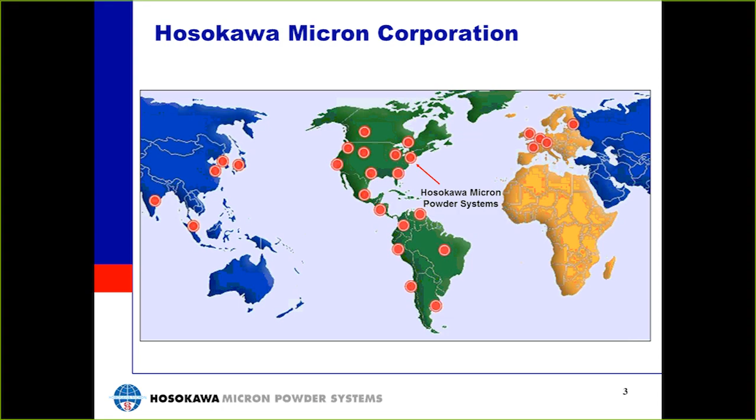Hosokawa Micron Powder Systems was founded in 1923 under the name Pulverizing Machinery. We design, manufacture, and assemble equipment for size reduction, classification, mixing, compaction, and laboratory analysis in the North and South American markets. Our equipment is designed for chemicals, food, pharmaceuticals, minerals, cosmetics, and plastic industries. We have a research and test facility complete with analytical laboratory in our Summit, New Jersey office, where we encourage our customers to join us for trials and system evaluations.

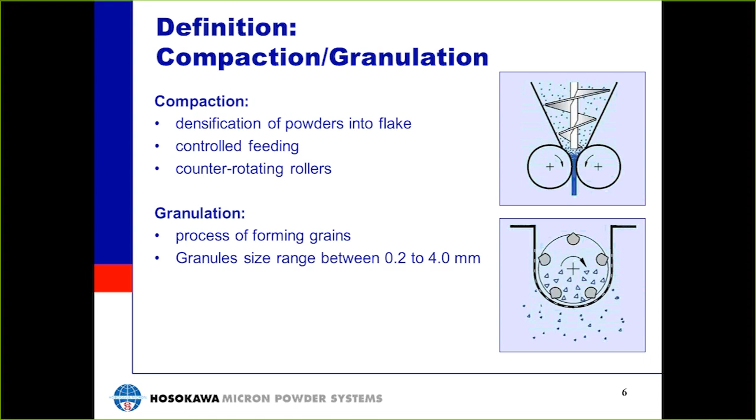For granulation, I found something in Wikipedia. Granulation is the act or process of forming or crystallizing into grains. Granules typically have a size range between 0.2 and 4 mm, depending on their subsequent use. Transferred into our process, we use the term granulation for crushing the flakes into granule size.

Talking about briquetting - the word itself sounds a little bit like brick, which is a single, solid, and hard piece. Briquetting is the densification of dry powders into a single, solid briquette. The briquetting process can take place with or without binder. The binder can be liquid or powder. For briquetting in a roller compactor, we can add that densification process is achieved by controlled feeding of powder through a set of directly opposed counter-rotating rollers.

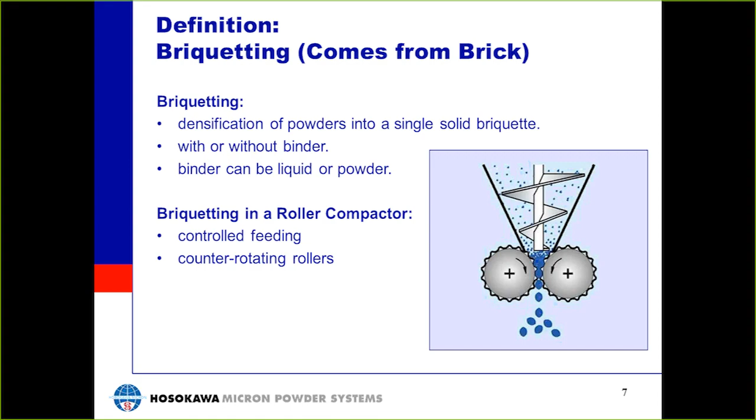In case we do not change the material nor the tools during a run, the functions are much simpler and can be seen as the volume fed into the roller gap, which is a function of the process. The volume which gets out of the roller gap can be seen as a function of the process too.

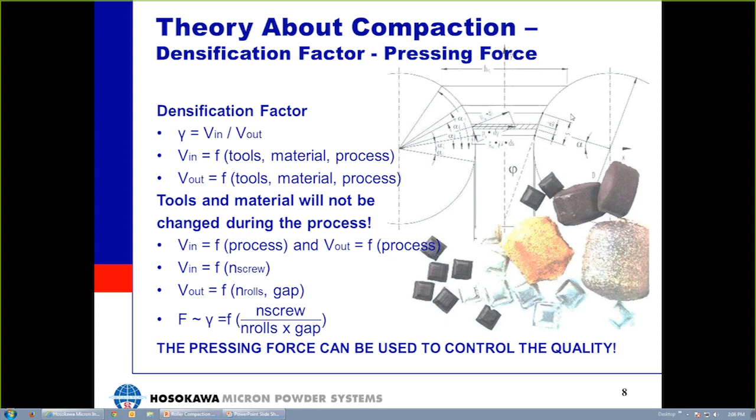The densification factor describes the ratio between the volume of the material before and after compaction. A hydraulic system always creates an external force to keep the rolls together. The compaction force is always created by the material. In larger roller compactors, one roll is designed fixed and the other one is equipped with a hydraulic device.

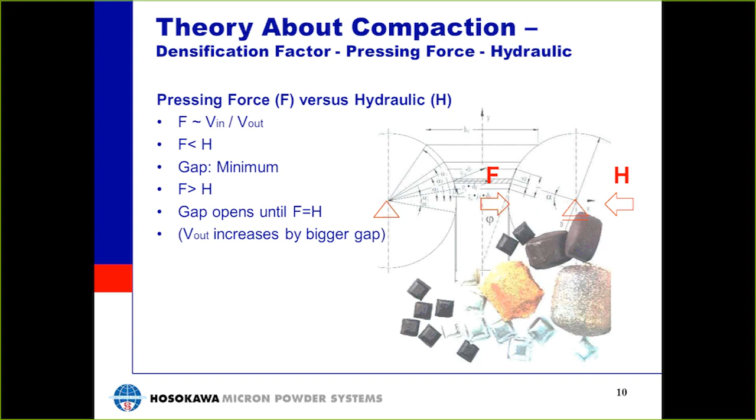In case the compaction force is smaller than the hydraulic force, H, the gap will be at the minimum. In case the compaction force F is bigger than the hydraulic force, the gap will increase until the compaction force F is equal to the hydraulic force. The system acts like a self-control. The hydraulic never creates a pressing force - it only limits it.

The compaction process can be divided into 3 zones. In the first zone, the material slips still a little bit on the roll surface, and only small stresses are acting on the material. The product starts to densify. The pressing force in this zone is 0.

In the second zone, the material doesn't slip anymore. The material deforms plastically under heavy stress performed by the rolls. The so-called nip angle is defined at the point where the material starts to move into the nip. Compaction takes place in this zone until the neutral angle is reached. The pressing force increases from 0 to the maximum value.

In the third zone, the material expands because the pressing force is reduced to 0. Due to this effect, the material speed is faster than the roll speed. The pressing force is reduced from the maximum value to 0.

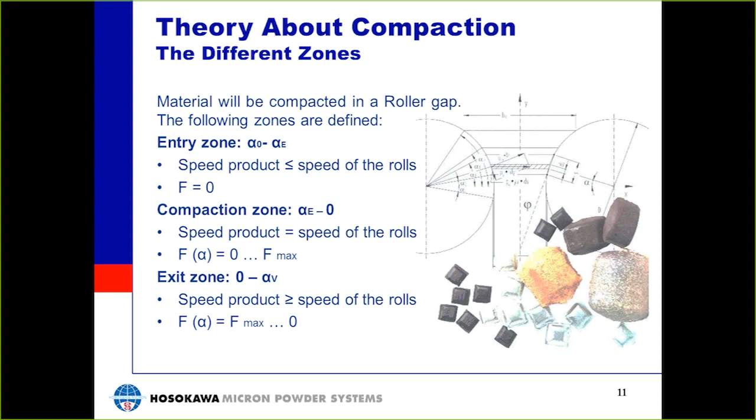Inside the different zones, the following happens. In the entering zone, the material starts to densify. The small particles start to move into gaps between bigger particles. Inside the compaction zone, the material moving process goes on. In case the feed material contains not enough fines, it will be created by pressure and friction.

The pressure inside the flake reaches the maximum value and the maximum density. The bonds are created. In the exit zone, the material releases the roller gap. The pressing force is reduced to 0, and the flake expands again.

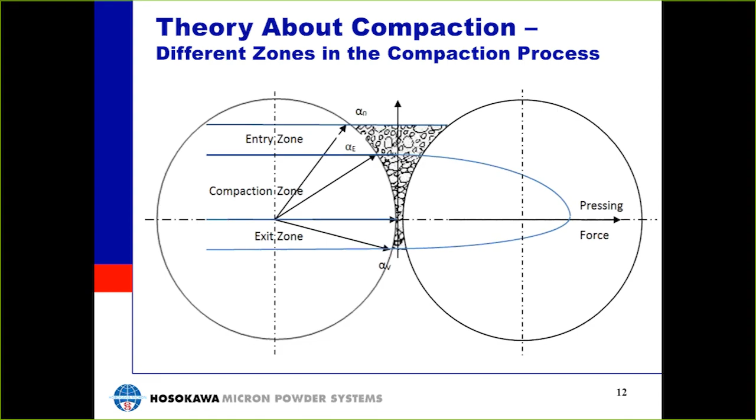In the exit zone, the flakes and briquettes are released from the roll. After taking the pressing force from the material, it will expand like I told you before, and this effect is related to the Young modulus of the material. The Young modulus is the tension divided by the strain.

But it's also something that too high forces will destroy already activated bonds. We call this effect the overpressing effect.

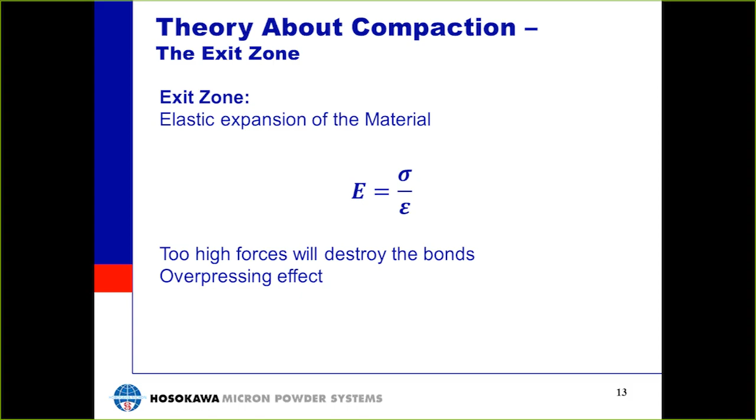When you don't want to have this effect inside, you have to reduce the pressing forces.

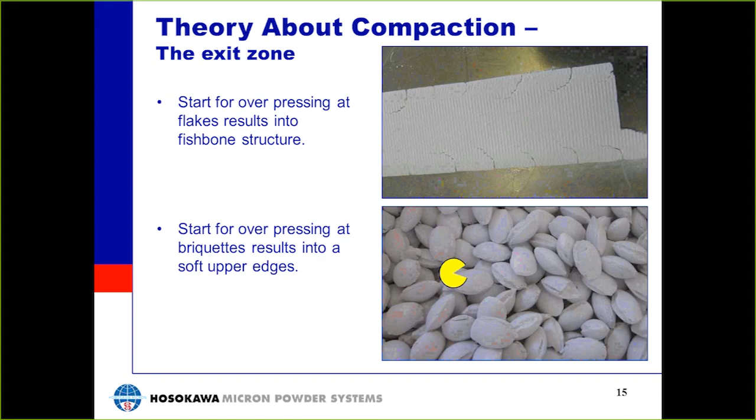All pressing forces will apply to the material via friction. In the easiest compactor, which has only gravity feeding, the part of the gravity force which acts rectangular on the surface of the roll works as a normal force. The friction force is equal to the product of the friction coefficient and the normal force.

You can see this here. At the same time, the already densified material will expand. So, to achieve high throughput, the compaction zone shall be as large as possible, which means you cannot increase the speed of the rolls as high as you want.

There are some machine parameters which help you to increase the nip angle. One is a rough roll surface or forced feeding. Most modern compaction machines do have a forced feeding system, mostly with a screw feeder. Also a low roll speed increases the nip angle, a small gap, and also a low pressing force.

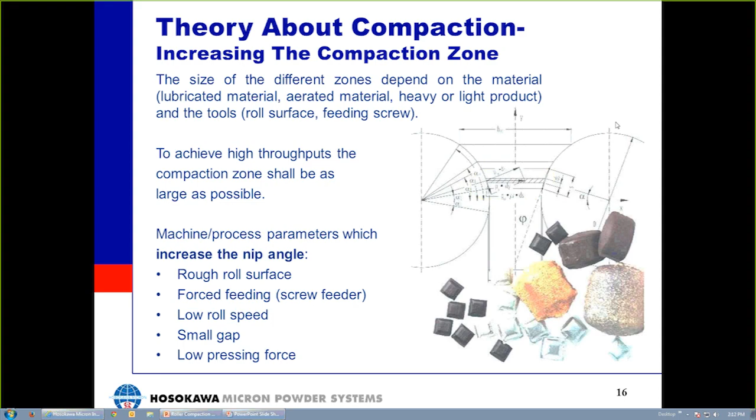In the exit zone, the material expands. There will be a relative movement between the flake and the roll. This is not critical for normal products, but in case of abrasive material, high wear occurs.

The roller gap influences the throughput. Due to the elastic expansion, a larger gap also increases the time for the material in contact with the rolls. In case of too large gaps, the flake or briquette can stay in the pocket of the roll.

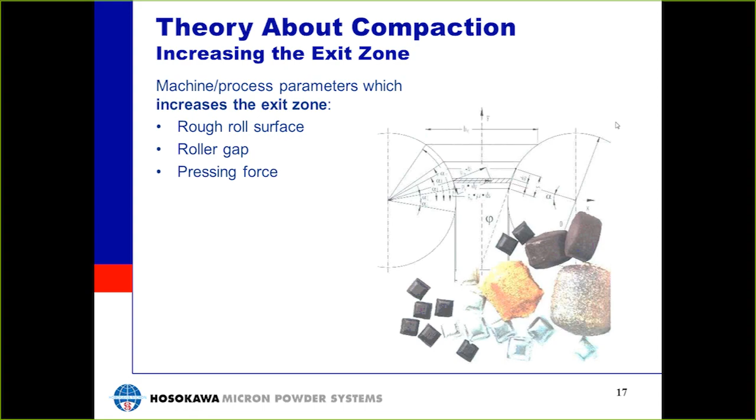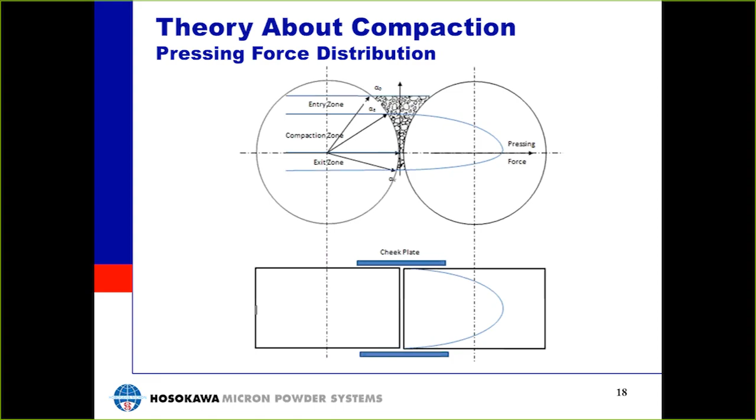The upper part of the picture shows the distribution of the pressing force in case of gravity feeding and flat roller surface. This is also known as the pressing force distribution according to Johanson. In the lower part, the pressing force is shown as a function of the width of the rolls. At the edges, it is zero. In practice, we work with a feeding auger to increase the compaction zone.

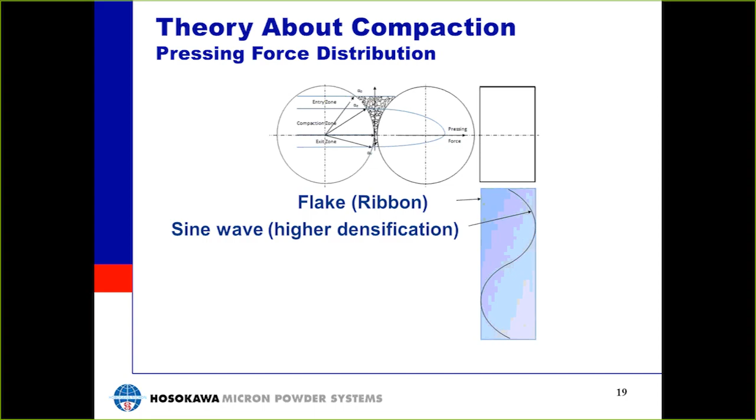So this is what you can see here. By using a feeding auger, a sine wave will be applied on the roll, which is caused by the last blade of the feeding auger. For better understanding, it can be explained that the powder material is more elastic than the last blade of the feeding auger. The real pressing force can be seen as a superposition of all three effects.

Powders with fine particles contain a lot of air. This air has to be removed during compaction. Removing of air always works by moving of particles. Therefore, a force has to be transferred to the particles, which is responsible for the movement.

The picture shows a model of how a force is transferred to the particles. An initial force F works on a particle which lays on three other particles. For every particle, the balance of forces is zero in x, y, and z direction.

The picture shows that due to this effect, the forces will be reduced on the right side by every contact they have. The second effect is in removing of all air with these particles which are acting like a filter.

The removal of air through a very fine filter is harder than a coarse filter.

In case of recycling of fines, for tabletting, the material which is less than 200 micron will be recycled and fed back to the compactor with the virgin powder. In most cases, the virgin powder has a D50 of 10 to 50 micron.

In case the number of particle-particle contacts are reduced by using recycled material. This effect is also often used in pre-granulation before tabletting in the pharmaceutical industry or in any other tabletting machine. As an example, pressing of hard metal plates for drilling equipment, pressing of special ceramics.

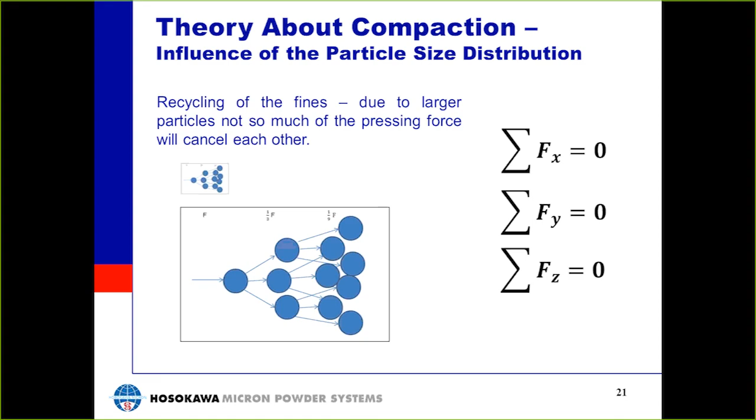In most applications, a certain amount of fines is required to fill the gaps between larger particles. In case this fines is not part of the feed material, it has to be created by friction and compression. The compression and friction require a part of the energy, which is the total pressing force.

To use more of the total pressing force, a wide particle size distribution, lubrication of the feed, and recycling of the fines are proper methods.

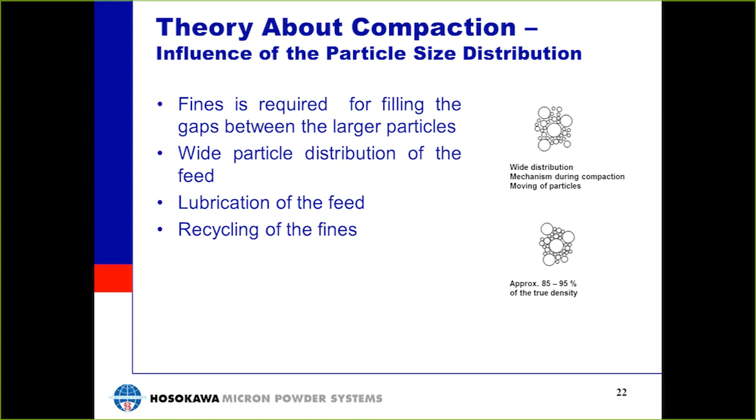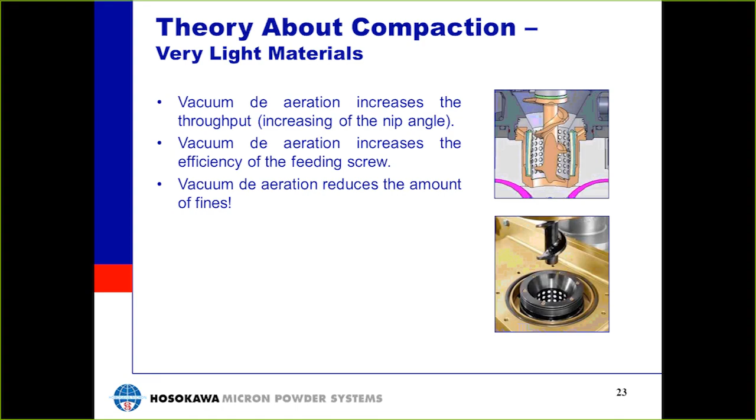A second effect of the vacuum deaeration is the reduced amount of air inside the product. The air of the feed material is released through the gaps between the roll and cheek plates. Due to the high speed of air, a certain amount of fine material will be taken with the air and leave the rolls without being compacted.

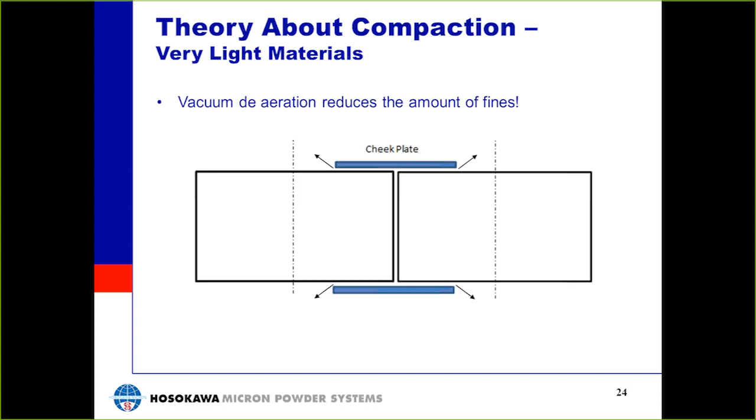In case of vacuum deaeration, the speed of the air in the gap between the rolls and cheek plates is reduced, and the amount of fines is reduced as well. On the other hand, the roll speed can be increased.

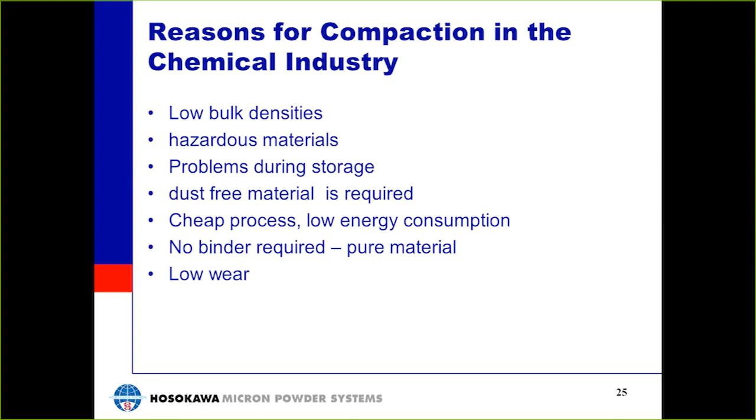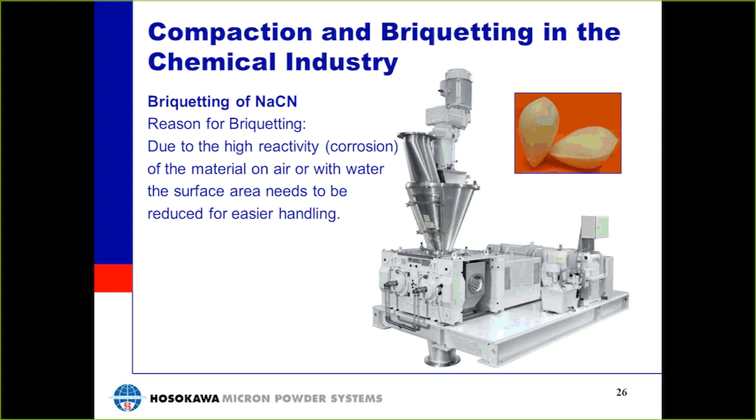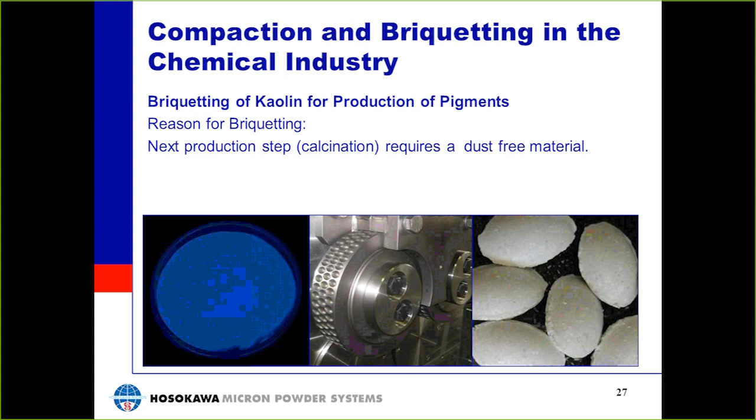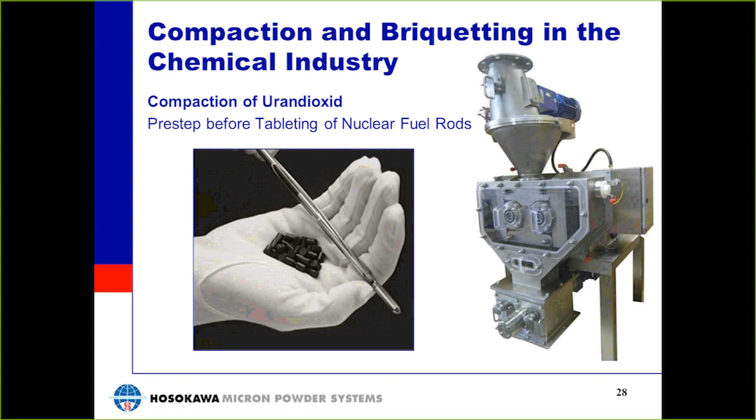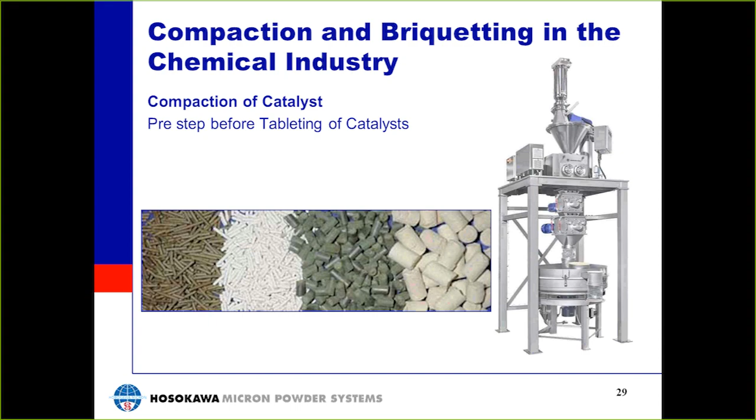The brake pad mixture is very abrasive. Because of compaction, pressing force in the tabletting machine can be reduced. This reduces the abrasion in the tabletting press because the pressing force in the tablet press can be reduced to achieve the same density.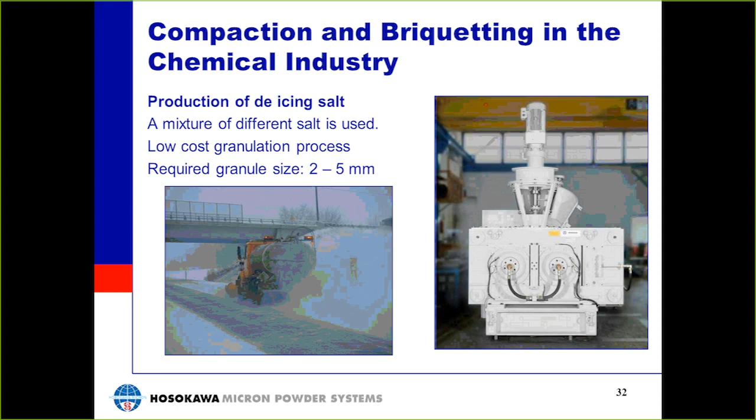There are different tests we can make on the material before and during a lab test on compaction or briquetting. The most important one is the Piston Press test. It is an initial test, used for testing the compaction behavior of a material. With a very small amount of the material, the compaction behavior can be tested. After that, the density of the tablet can be measured and also the strength.

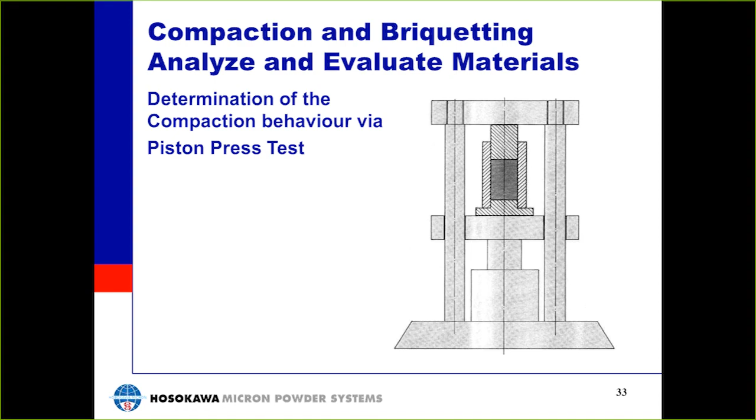During lab tests, the particle size distribution of the feed material and the granules can be measured. Therefore, an air jet screen will be used.

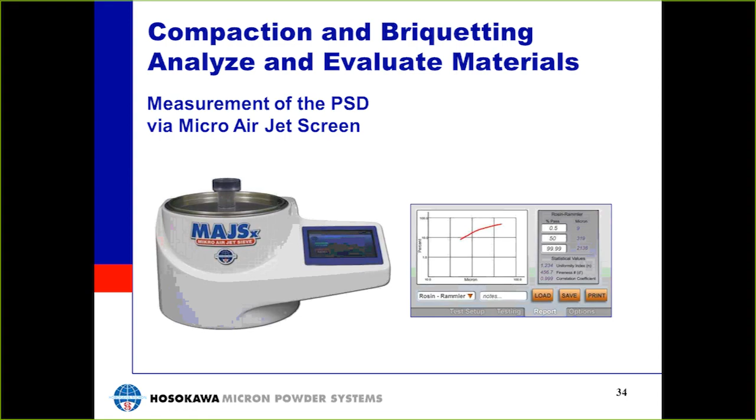The density of the flake or briquette is important for the quality. It influences throughput and also the hardness. The bulk density depends also on the density of the flake. For measuring the density, we follow the Archimedes principle. This is a simple method which can be carried out in a few minutes.

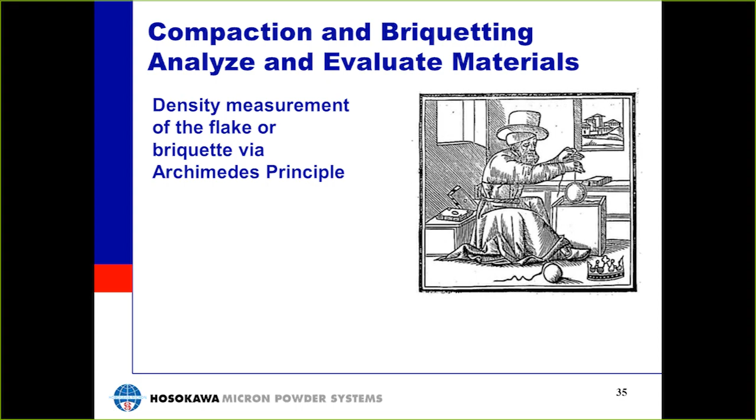The bulk density is important when the material needs to be packed in bags or to reduce the transport cost. In our lab, we can measure the packed and loose bulk density in the Hosokawa Micron powder tester.

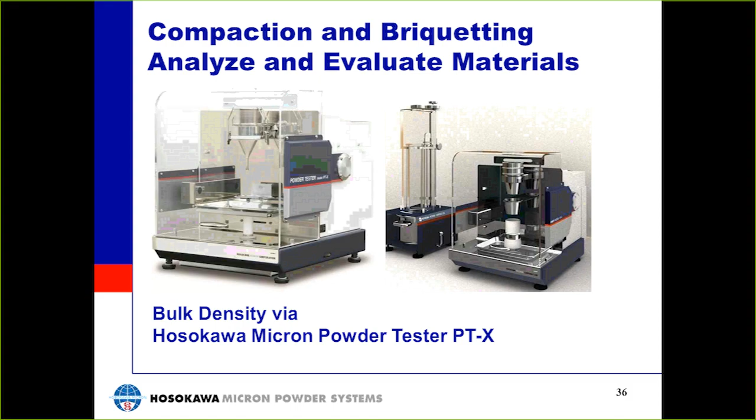The strength of briquette is important for the handling because it should be resistant during the transport to the place where it is required. For the shatter test, a sample of the briquettes will be de-dusted by screening. After that, it will be thrown from a height of 2.5 meters several times on a steel plate. These results can be given like: first fall from 2.5 meters, 95% bigger than 10 millimeter; and second fall from 2.5 meters, 90% still bigger than 10 millimeter.

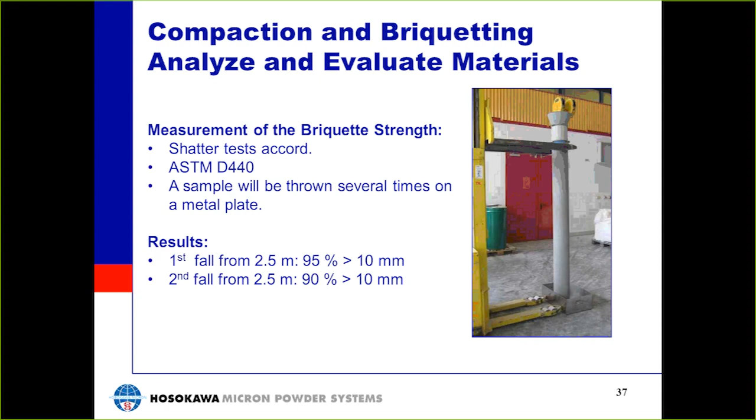The strength of briquettes can be measured also with a hydraulic press. Therefore, the pressure on the briquettes will be increased until it breaks. Two different modes can be used for measuring pressure and break resistance.

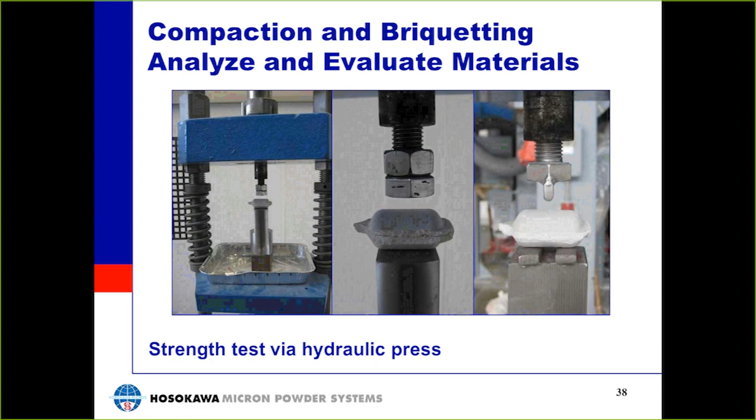Cleaning is done in a separate cleaning area. Typical for this system are a low-medium throughput capacity, variable batch sizes, multiple products, cleaning, and high quality of compaction are the most important issues.

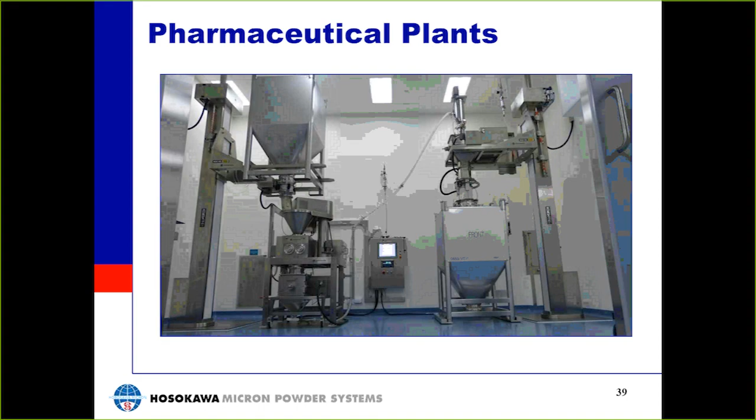For good and easy cleaning, these systems are mobile. All the cables can be disconnected easily. The heavy parts will be taken by a forklift. So you can see that, for example, here. And here you can also see that everything is splittable.

These installations are one-floor installations.

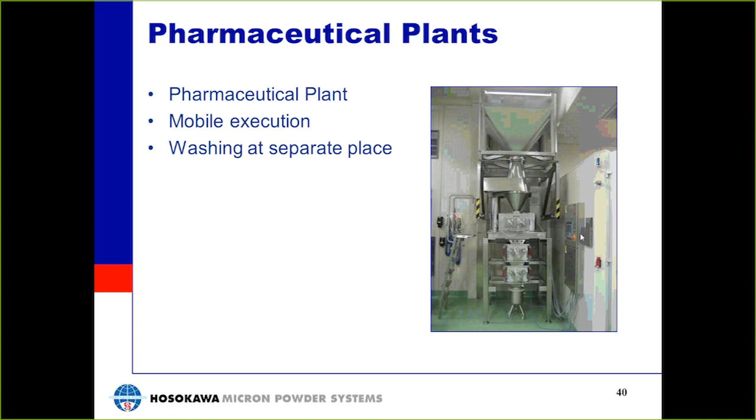For pharmaceuticals with a low amount of API, such as pharmaceuticals which contain very hazardous or multi-component API, compactors with a low throughput capacity between 50 and 120 kg per hour are often used. Systems for not-so-hazardous APIs are very similar to the small throughput systems for high APIs. They are characterized by low throughput capacities, small batch sizes, multiple products, and cleaning and high quality of compaction—contamination as low as possible is the most important issue.

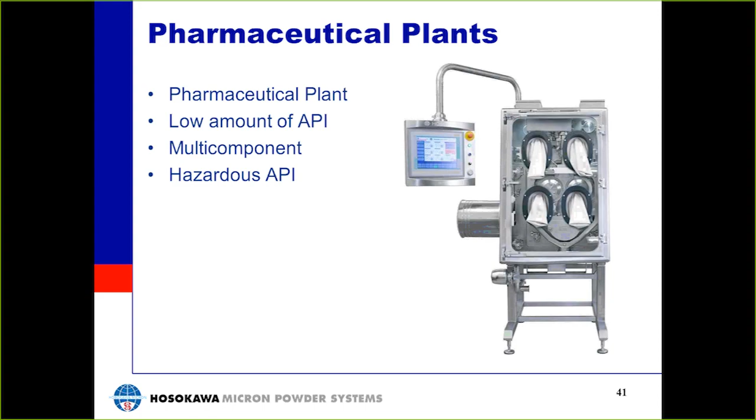For very hazardous API, machines inside a containment are used. Like shown here in the picture, protection of the operator has the highest priority. Cleaning and avoiding cross-contamination are also very important. Cleaning will be done inside the closed containment.

This picture is a good example of what we can offer our customer in case the standard design cannot meet their requirements: special materials and special coatings on the machine, based on our standard.

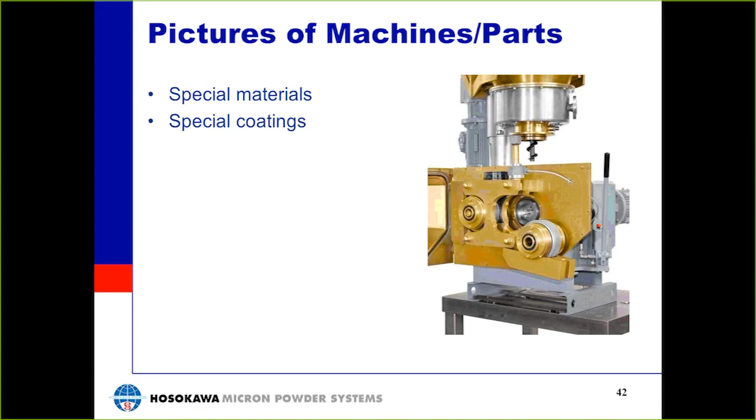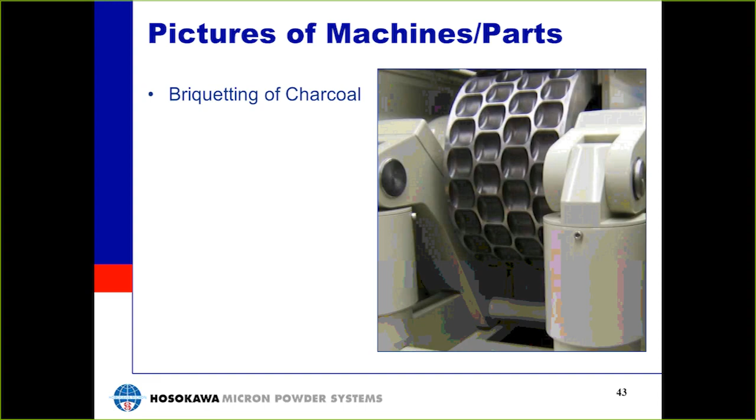For briquetting of charcoal, we have a low pressure version because briquetting of charcoal does not require so much pressing force. Here you can see a roll tire of a briquetting machine with almond shape. The throughput of this machine is about 10 tons an hour.

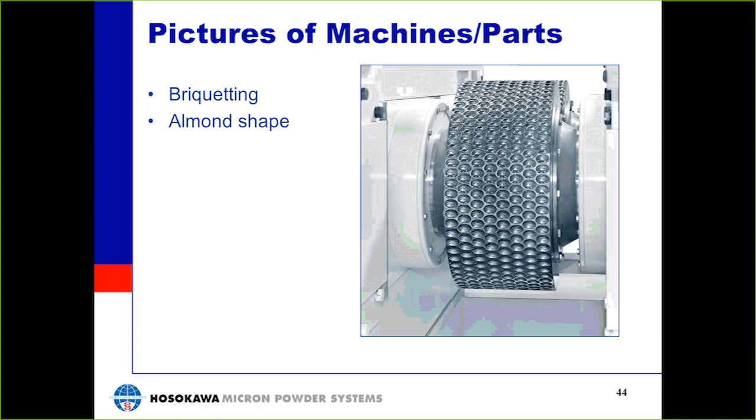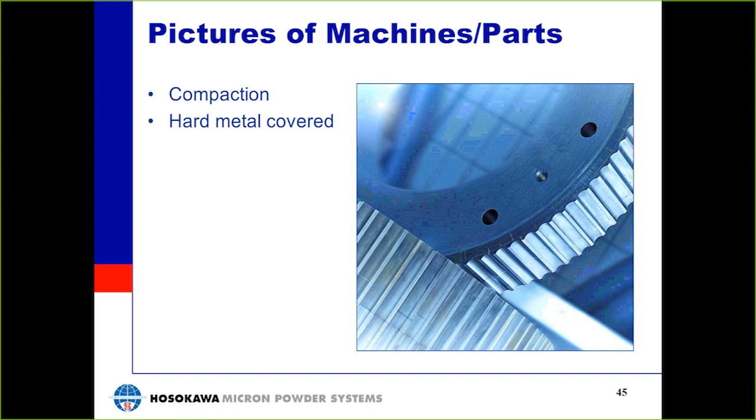These rolls are designed for very abrasive materials. They are hard-faced with hard metal. Here you can see a standard roll tire used for compaction, and a smooth roll tire used for high-pressure roller grinding.

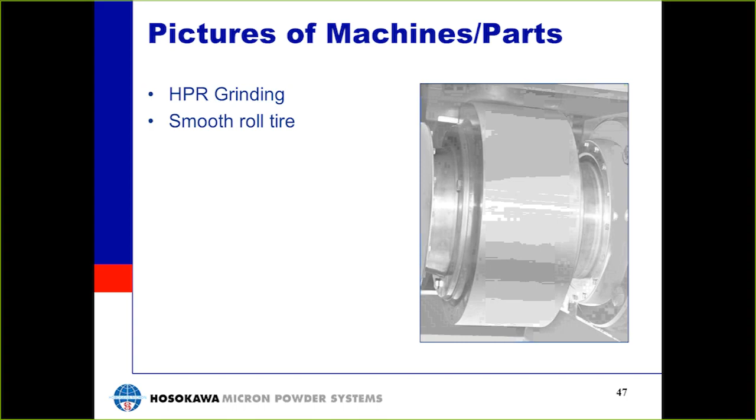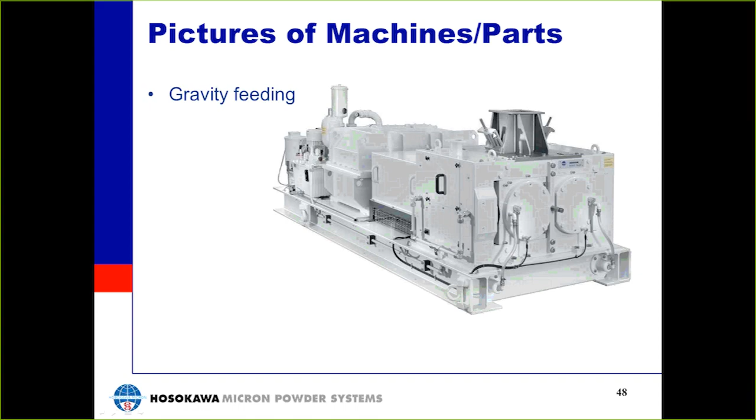A roller compactor with gravity feeding. The sliding gates here at the side are for adjustment of the flow.

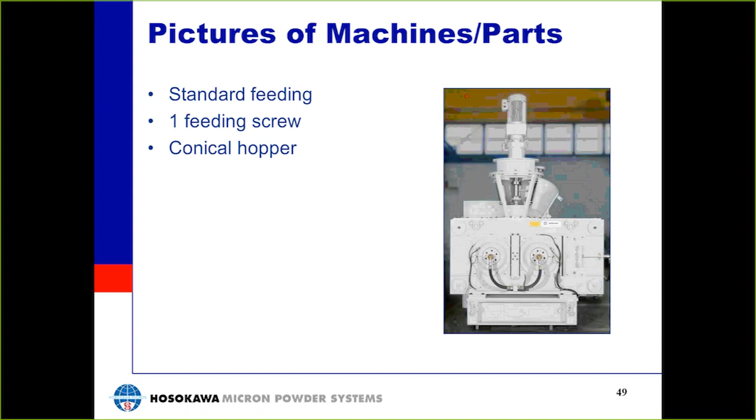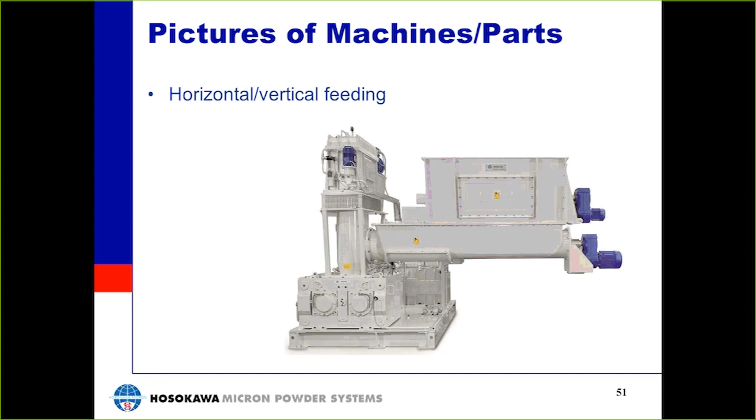So during the last minutes we talked about the theory of compaction, the different forces which act on the particles to perform the bonds. The stages of compaction in a roller compactor were described. Special solutions like vacuum de-aeration were explained. Examples for compaction and briquetting were given. There are different ways to determine the quality of the compaction and briquetting, and an overview of the measuring systems was given as well.

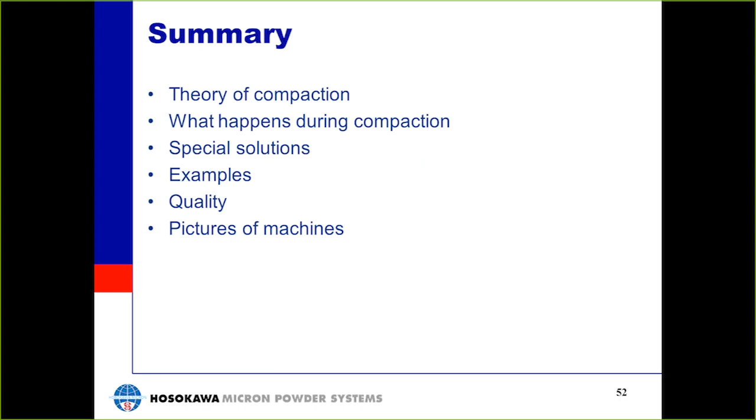So we just received the first question: why will some material pack inside the feed screw? Are there any solutions to material packing inside the feed screw? Every material has a pressing force where the bonding mechanisms start. In case these forces are very low, it can be reached also in the screw. In this case, the forces in the screw have to be reduced, or gravity feeding has to be used. Sometimes the solution is to change the surface of the screw. In most applications, coating of the screw will not work because of abrasion. In case this does not satisfy you, you can see my email address—please send me an email.

We also received the question: do you have any application in cosmetic products where the product is very cohesive and has very low flowability? In cosmetic production, we don't have so many applications. Compaction is always an intermediate industrial process, and in the cosmetic industry, I know that, for example, powders are the end product. So I do not know of any of these processes, at least not at the moment. In this case as well, I would like to ask you to contact me later with more information, which we cannot handle here at this webinar.